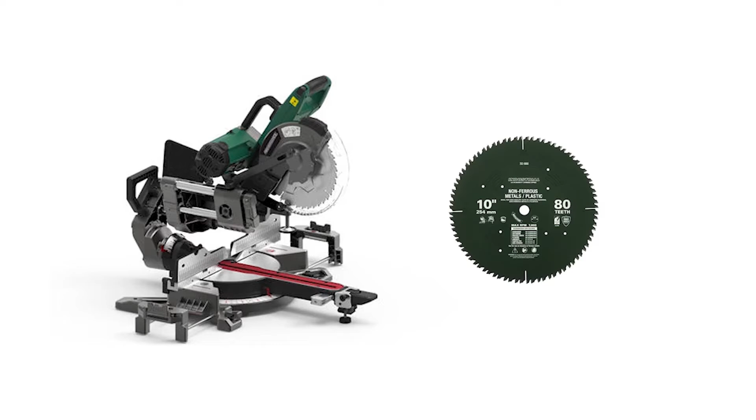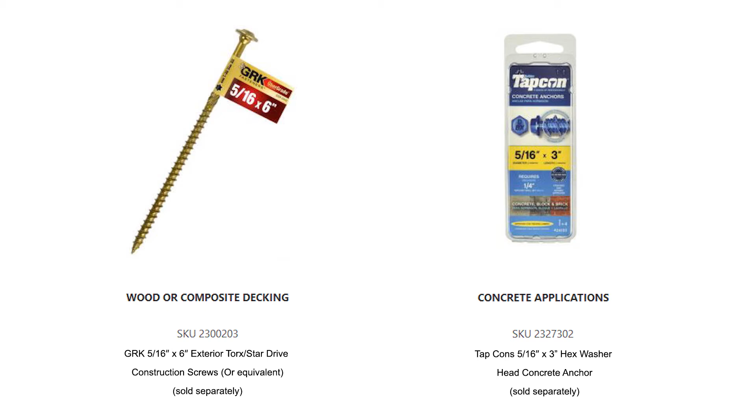We recommend the following tools: safety glasses, tape measure, pencil, level, miter saw with non-ferrous blade, cordless drill, 4 clamps, carpenter square, appropriate fasteners for mounting posts to deck surface, lower rail clip jig, cutoff tool, 6-inch number 2 square

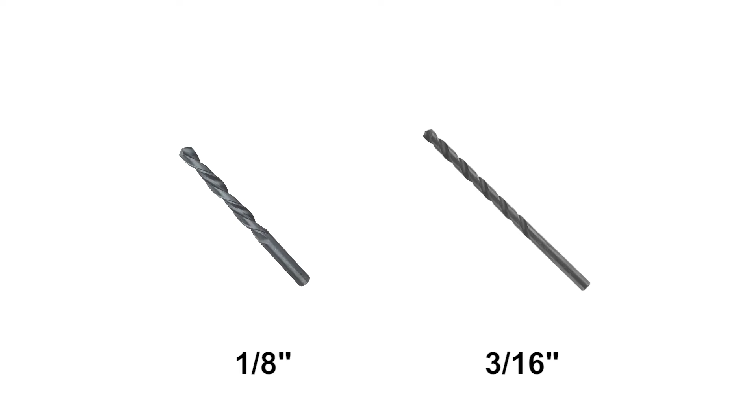drive bit, 1/8" and 3/16" drill bits, 3/16" hex wrench, included with cable kits, cable gripping tool, optional, cable cutting tool, optional, cable release tool, optional, threading tool, optional, 90-degree threading tool, optional.

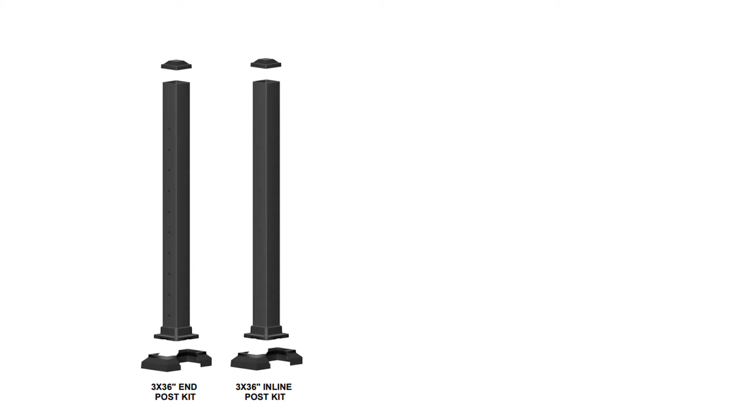Kits and parts for assembly: 3x36" end post, 3x36" inline post, 3x36" corner post, 3x42" inline stair post, 3x42" end stair post. Each post kit includes an aluminum post tube with attached base plate, post cap, and 2-piece base plate cover and an install guide.

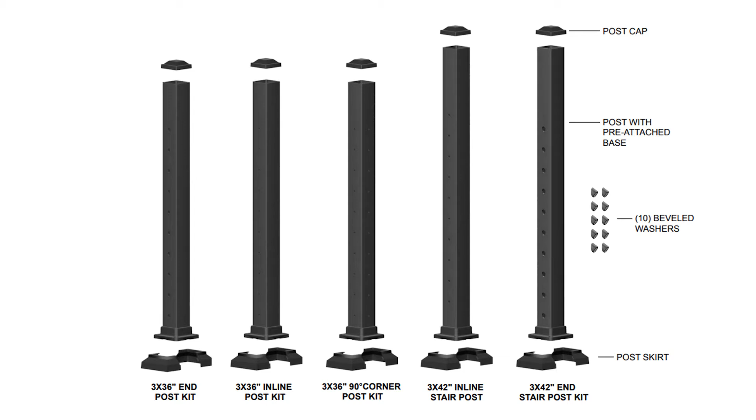3x42" end stair post kit includes 10 beveled washers. Post to deck mount screws, anchors are sold separately. Horizontal cable kits available in lengths of 5 feet to 60 feet. 1 1/8" stainless steel cable with pre-attached threaded stud in 5 feet to 60 feet lengths, increments of 5 feet. 1 1/8" threaded receiver fitting.

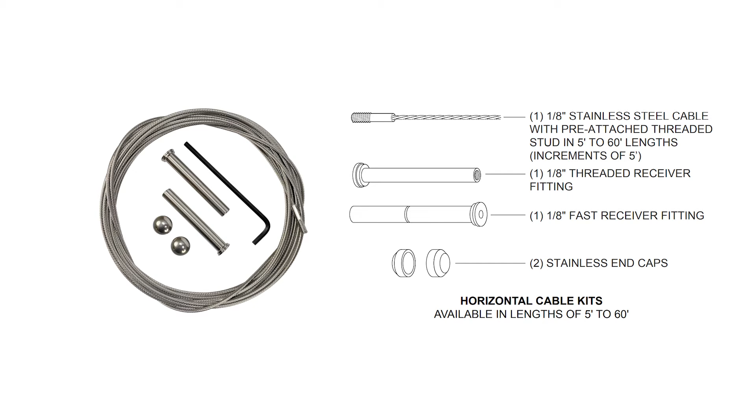1 1/8" fast receiver fitting. 2 stainless end caps. Horizontal cable deck stair full frame kit: 1 top rail snap. 1 top U-channel. 2 straight plastic plugs. 2 angled plastic plugs. 1 intermediate cable support. 1 bottom U-channel. 1 bottom rail snap. 4 deck attach clips.

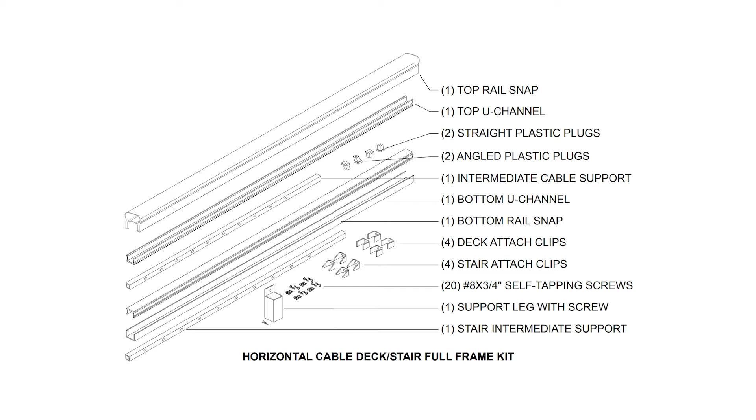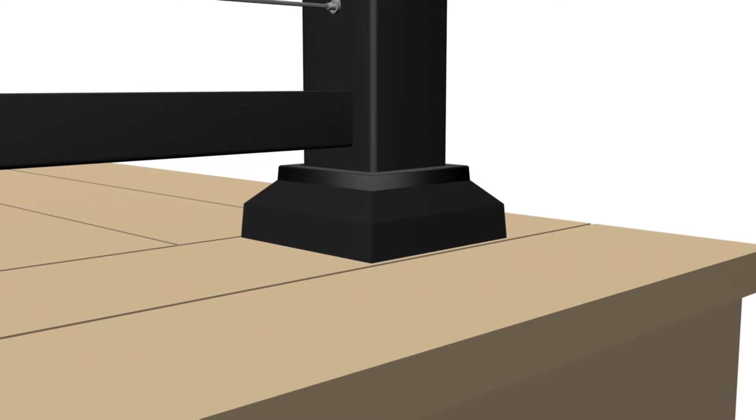4 stair attach clips. 20 number 8x3/4" self-tapping screws. 1 support leg with screw. 1 stair intermediate support. Important notes: do not install base plate covers until railing assembly is completed. Actual cable panel lengths: 69.43 inches and 91.31 inches. 3-inch posts are required to reach 6-foot and 8-foot lengths.

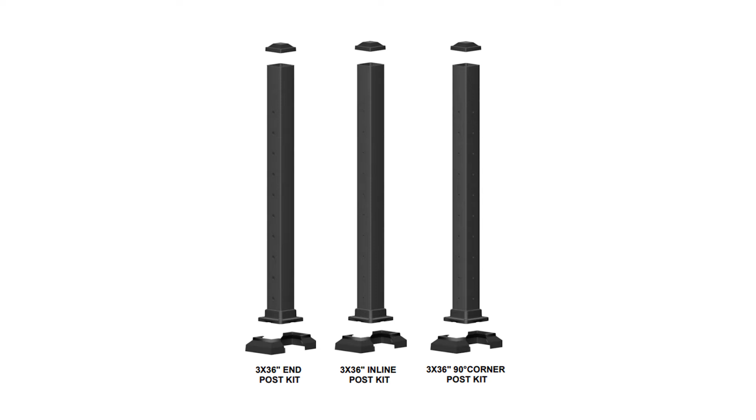Caution: if installing lighting, wiring must be installed prior to securing posts to deck surface and installing top rail snaps. Let's get started. First, we'll plan out and install the 3-inch aluminum posts. Determine necessary posts required: end, inline, or corner. Note: for structural integrity and proper installation, it is critical to use the correct railing posts in all locations.

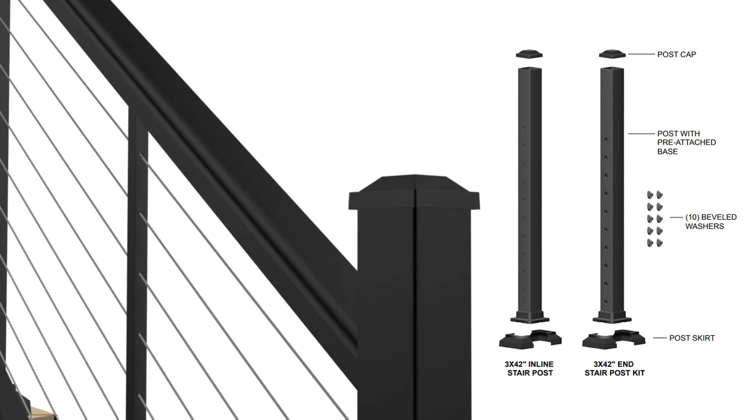Corner posts are required for all 90-degree corners, and inline posts are required for all 45-degree corners. 42-inch stair posts are required for stair applications. Plan ahead for cables up to 60 feet in length and install end posts at the appropriate locations. Important: for 90-degree corner post applications, prior to installing rail attachment clips, ensure plastic plugs are installed in 2 pre-drilled hole locations. Leave plastic plugs in place until threading cable through corner posts.

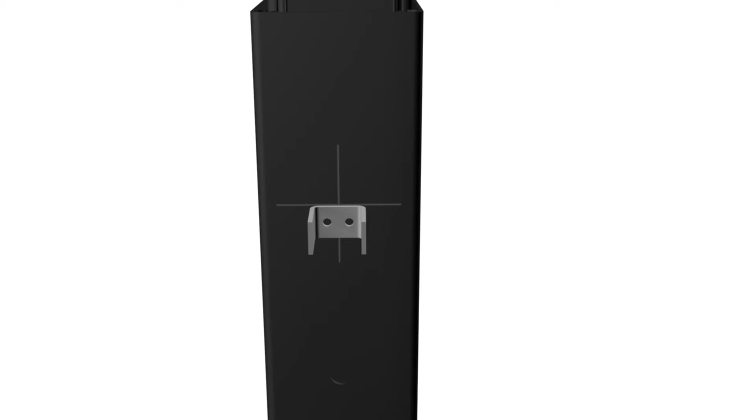Measure from the top of the base plate upper shoulder. Place a horizontal pencil mark at 33 3/8 inches for 36-inch rail height. Next, measure the center of the 3-inch posts and place a vertical mark at center of post. Install 1 upper attach clip per opening. Center 1 upper clip on pencil line. Secure attach clip with 2 number 8x3/4" self-tapping screws. Important: only install 1 upper clip per opening.

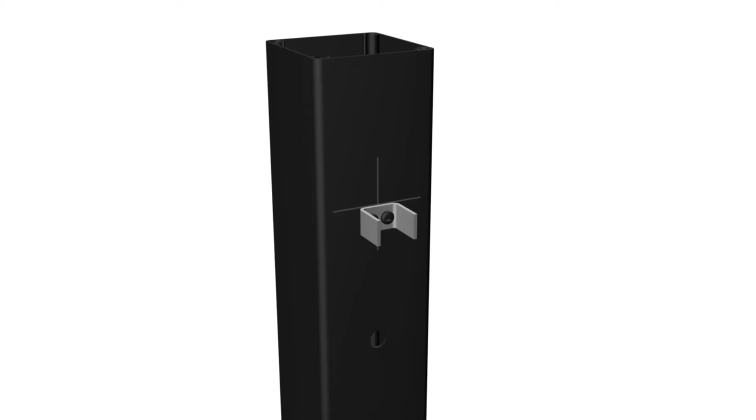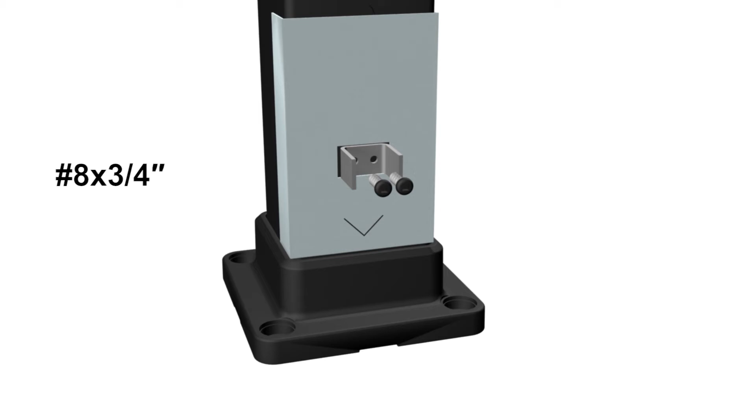Using the lower clip jig included with the post kits, install lower clip on post and secure with two number 8 by 3/4 inch self-tapping screws. Clips and screws are located in the panel kit. Top rail kits without bottom rail: if no bottom rail is installed, do not install lower rail clips. Bottom rail snap, lower rail clips, and support legs are not included in top rail kits. Important: for safety and to comply with building codes, 10th cable must be installed with a 36-inch rail height.

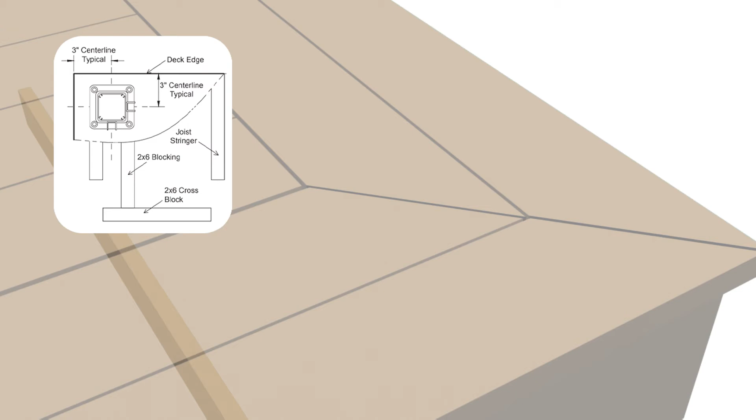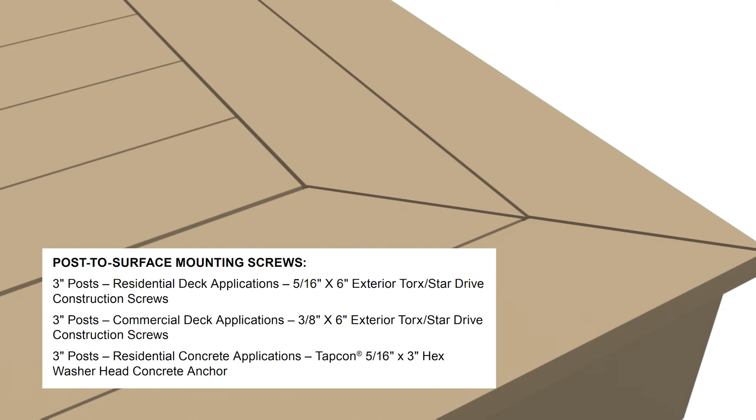Install proper post blocking. Use proper attachment screws or anchors as directed. Deck screws at each post location are not included with post kits. With 3/16-inch drill bit, pre-drill through deck boards and into blocking. Drill a 5/8-inch hole in center of 4 deck screw holes for lighting wires. Optional. Level and plumb post using shims. Secure posts to deck with suggested screws.

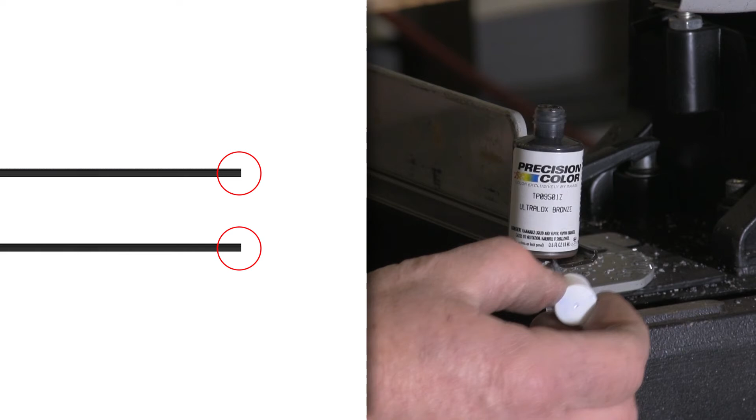Now we'll go over the deck installation with the bottom rail. This system uses the deck stair full frame kits. Measure openings between posts and cut 2 U-channels per opening. Cut 1/16 inch less than opening size. Clean cut areas and apply touch-up paint on exposed ends. Measure each U-channel and mark the center of U-channels. Drill 1/8 inch hole in the center of each U-channel.

For 36-inch height railing, cut support to 29 3/4 inches. Important: only cut from bottom end of support, which can be identified by a longer section without a cable hole. Verify alignment of cable holes with posts before cutting. Attach 3/4 inch by 3/4 inch plastic plug into the flat side of each U-channel with 3/4 inch stainless screw.

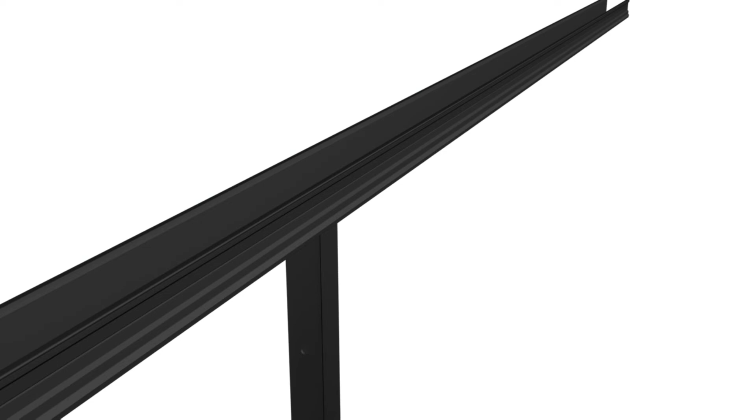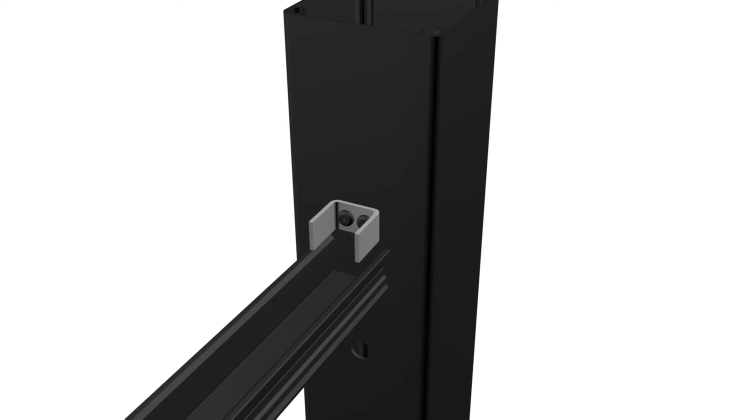Insert 3/4 inch by 3/4 inch intermediate cable support onto plastic plug, which is attached to lower U-channel. Then, attach upper U-channel by inserting attached plastic plug. Again, verify alignment of cable holes with posts. Place railing frame onto lower rail clips and slide one end of U-channel onto pre-installed upper channel clip. Secure one end of U-channel to pre-installed upper channel clip with 2 number 8 by 3/4 inch self-tapping screws.

At opposite end of U-channel, insert rail clip into U-channel. Align top edge of rail clip against prescribed pencil line. Attach rail clip using 4 number 8 by 3/4 inch self-tapping screws. Clamp or hold the top snap against posts and mark for cutting.

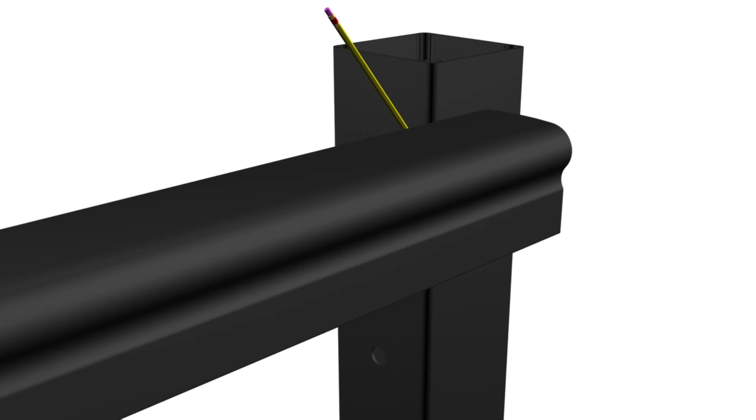Cut top and bottom snap covers 1/16 inch less than the opening. Clean the cut areas and apply touch-up paint on all exposed metal.

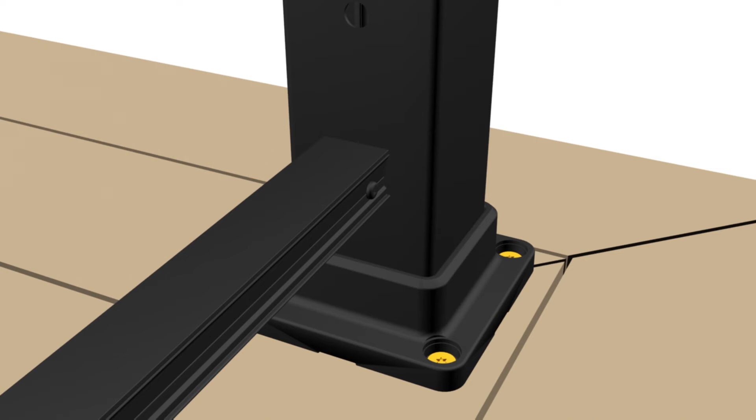Install the bottom rail snap first by pressing over the lower U-channel until properly seated. Install the support leg by sliding it under the bottom rail at the center of the rail opening. Using one painted number 8 by 3/4 inch self-tapping screw, secure the support leg to the bottom rail snap.

Install the top rail snap by pushing down on it until fully seated on the upper U-channel. Helpful hint: apply downward pressure on the top rail starting at one post and working towards the other post. Do not use a hammer to secure the top rail.

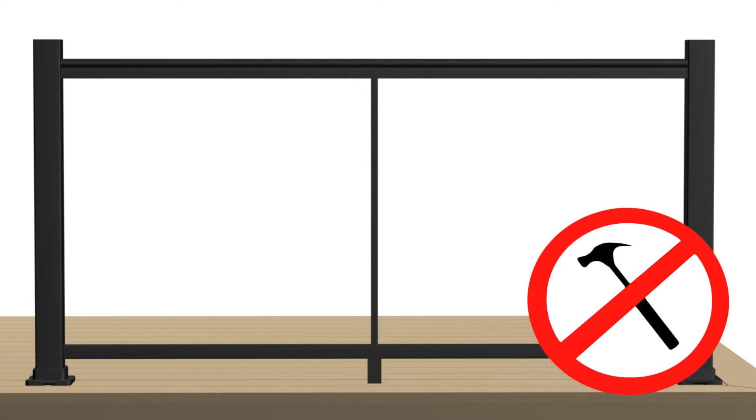Install plastic plugs only in the bottom cable holes of end posts which are not used with a bottom rail application.

Next, we'll install the horizontal stainless steel cables. Insert the threaded receiver fittings into the post.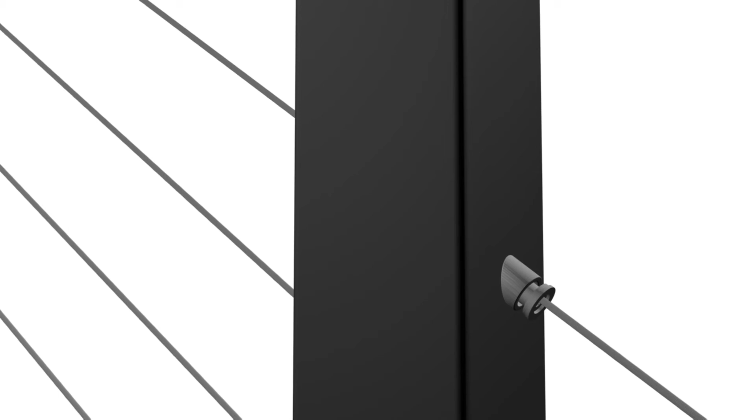Note: if the end post was installed too close to a house wall, it may be necessary to loosen the post anchor bolts. Plan so that the threaded receiver fittings are at the starting point and the fast-fitting receivers are at the bottom of the stair run or the final post on the deck.

Cable runs cannot be longer than 60 feet. If the railing is longer than 60 feet, an end post will need to be used to finish and start a new cable run. Thread the male swaged cable stud, attached to the cable, into the threaded receiver fitting, and turn 3 to 4 complete turns.

Thread about half of the stud into the threaded receiver fitting.

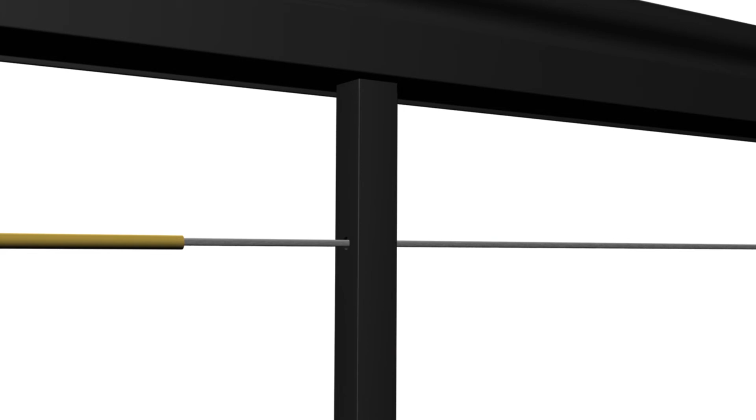Feed the bare end of the cable through all your intermediate cable supports and through the end post where you will be installing the fast receiver fitting.

Corner post inserts allow for easy feeding of cable through 90-degree posts. Cable threading tools, straight and corner versions, are recommended for easy feeding of cables.

When using the threading tools, push the cable through posts rather than pulling them. This prevents separation of the cable and tool.

Note: alignment plugs are installed in 90-degree posts to keep insert holes aligned. Do not remove the plugs until cables are installed into the empty holes.

Rotate the fast receiver fitting clockwise as you push it onto the cable. If the cable begins to unravel, you are rotating the fitting in the wrong direction.

Important: for bottom of stair runs, beveled washers must be installed to align fast receiver fittings with pre-drilled holes in the post. Note: it is normal to have trouble inserting the cable into some fittings.

This occurs if the locking mechanism is already locked. To free it up, insert a cable release tool or other tool with 1/8 inch or smaller diameter. Larger tools may get locked in the fitting and become very difficult to remove.

Push the fast receiver fitting along the cable and firmly into the hole in your post. While holding the receiver against the end post, pull the bare end of the cable to remove as much slack in the cable as possible.

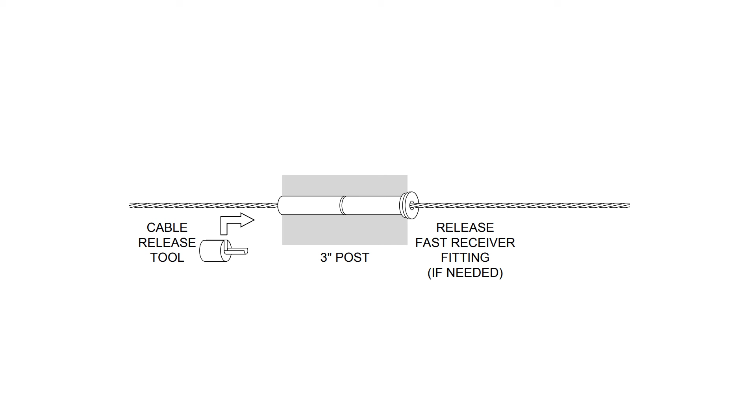Cut the cable flush with the hole in the back of the fast receiver fitting using a cutoff wheel.

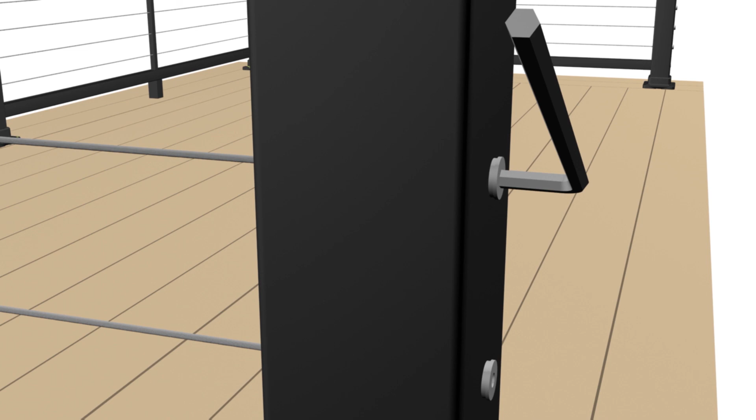Go to the other end and tension the cable by holding the cable securely to prevent it from turning while you turn the threaded receiver fitting with a hex wrench. A cable gripping tool is recommended.

Be careful to protect the cable from damage while tensioning. The male swaged cable stud will be pulled into the threaded receiver fitting by rotating the threaded receiver fitting clockwise.

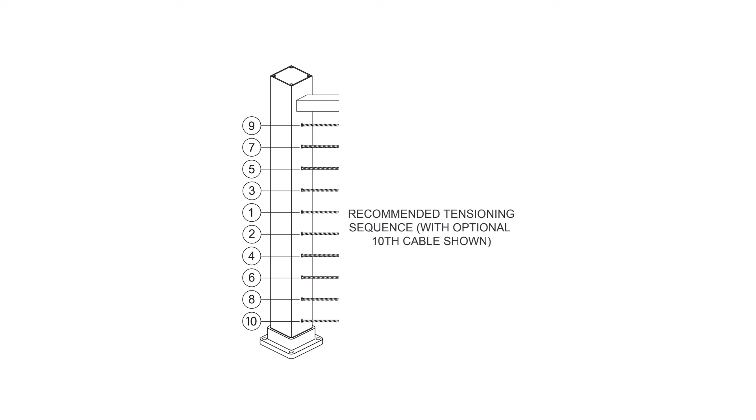Tension all cables in sequence, beginning with the center cables, moving up and down toward the top and bottom. As you tension each cable, give it a sharp pull downward mid-span to help set the wedges and gripping mechanisms in the fast receiver fittings. Then retension as necessary in the same sequence.

Be aware that the cable may move as much as 3/16 inch toward the tensioning terminal as the wedges seat.

Press stainless steel caps onto all fast receiver fittings and threaded receiver fittings. Helpful hint: spray window cleaner onto the stainless steel caps to ease installation.

Install post caps and post base plate vinyl covers after railing assembly is completed.